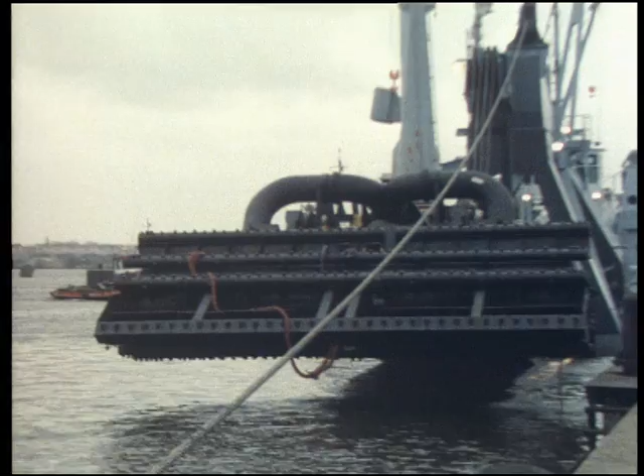The work to modify the Gotland for the Hong Kong contract was undertaken in Holland. Bilfinger and Berger installed a 10-meter wide device known as the dust pan. This is lowered to the seabed, where its powerful water jets loosen the relatively compact granular deposits. The dust pan, which exploits the deposits horizontally, is an innovative solution to the dredging problems involved, and it's the first time it has been used in a Hong Kong operation.

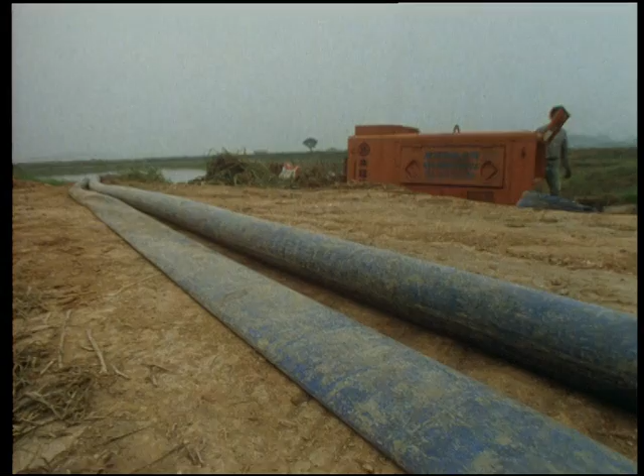Work on site in Hong Kong is also well underway. The ponds are dewatered, draining away to the north. New land will soon appear, formed as the sand, mixed with seawater in a proportion averaging 1:4, is pumped in. Just as the marine surveys have mapped out the ancient deposits which are to renew this land, so the land-based teams survey with great precision the old fish ponds, charting their depths, their retaining bunds, and their trackways.

The vast quantities of data which are gathered have to be inspected and modelled using computer algorithms to provide electronic maps and sections of the site. This MOSS modelling, as the particular computer package is known, allows the engineers to produce the required drawings very quickly, and also allows them to exercise stringent quality control over the whole operation, using online methods. The fill can thus be produced and placed exactly as required, at the optimum speed.

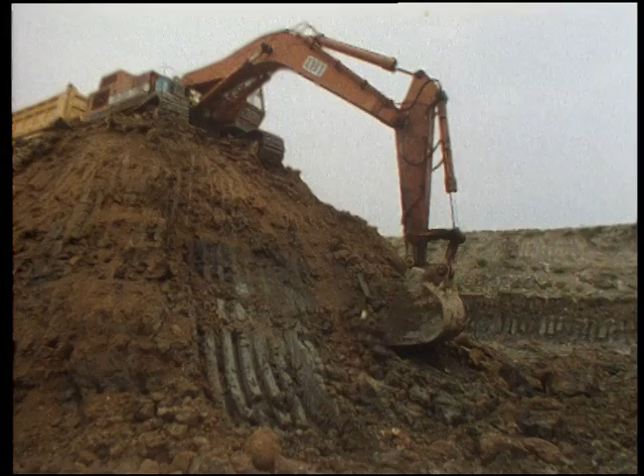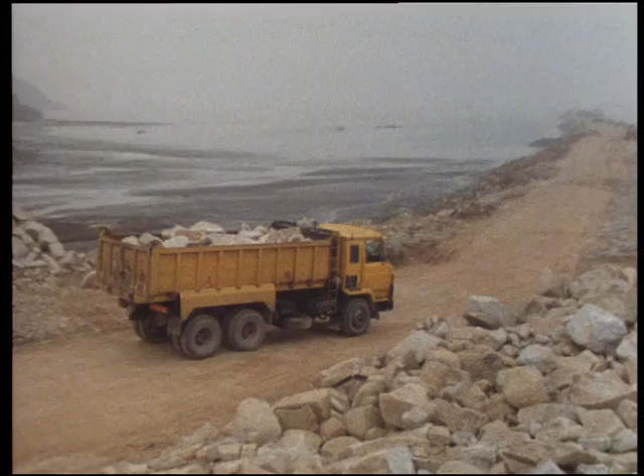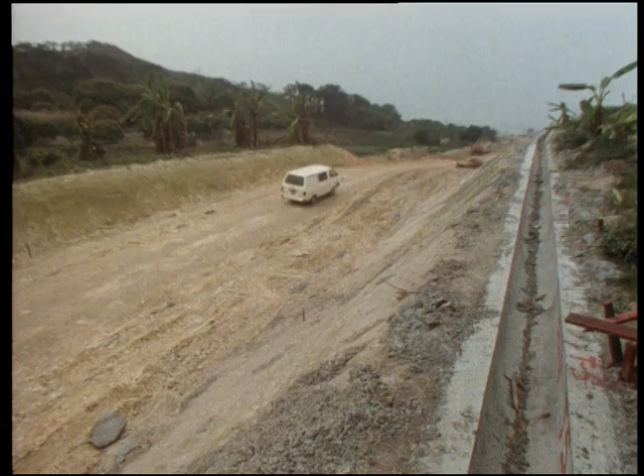Ponds may have died to their old use, but the soil from the bunds is conserved on tips that will eventually supply topsoil for the parks and public gardens of the new town. A causeway has been built as part of a land access corridor over 1,000 meters long. It is down this corridor that the pipeline delivering the fill will be laid. The land access corridor, like the entire scheme, is part of a design that seeks to disturb the surrounding environment as little as possible.

The scale of the project can be sensed from the fact that two of the ships involved in the dredging, the Gotland and the Neuland, were themselves shipped out to their workstations. The two dredgers' journey from Holland to Hong Kong lasted a month. They were transported on a dock lift vessel, which also had on board the 12 kilometers of pipe sections and the massive booster pumps, each weighing some 100 tons.

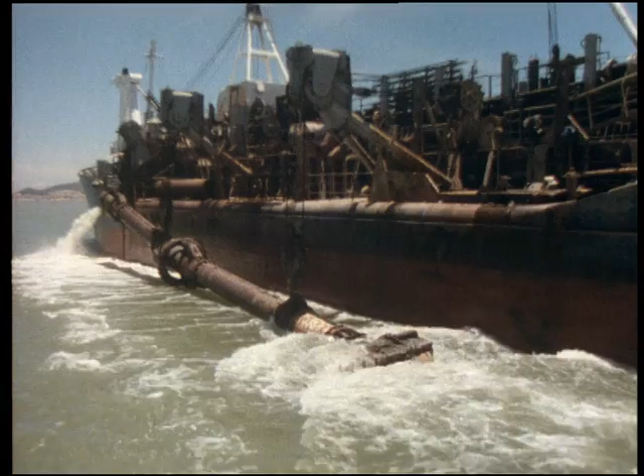The Wiesbaden has an important role to play. Some 30 million cubic meters of marine mud must be moved before the Gotland can get at the fill. The Wiesbaden systematically dredges the exact site of the spots selected by Bilfinger and Berger from the proposed borrow areas. She trails a suction head along the bottom. The mud is dredged by means of suction, and the Wiesbaden then heads for an area south of the island of Cheung Chau, some 50 kilometers away.

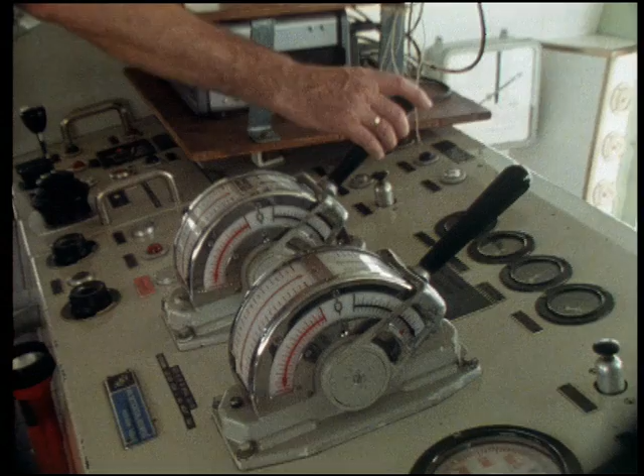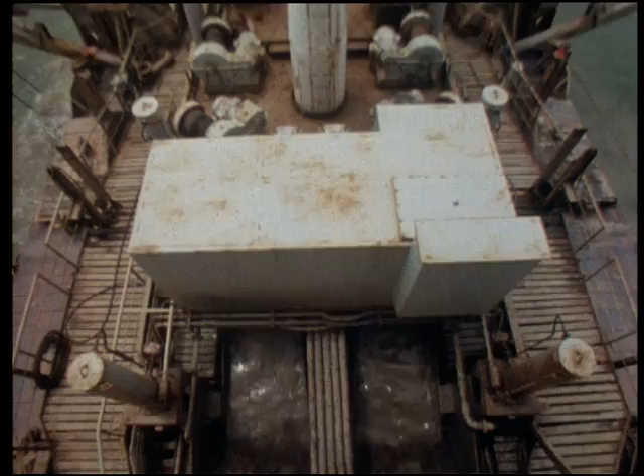Off Cheung Chau, the Wiesbaden deposits her load of mud by opening valves in her hull and starts back north for the next cycle of dredging.

Off the end of the causeway, another seabed excavation is underway. This is the formation of the rehandling basin, into which the fill will initially be placed. It is essential to have this basin if the fill so carefully won and sent up the coast by barge is to be optimally retrieved by the Bilberg 1 for pumping ashore. The barge train itself must operate within the confines of a specially dredged channel now being prepared.

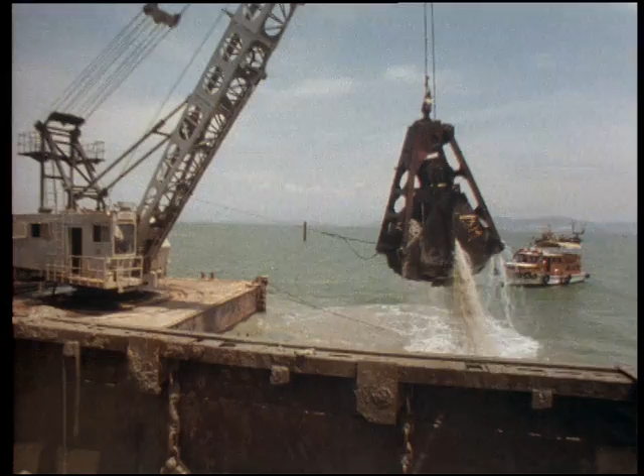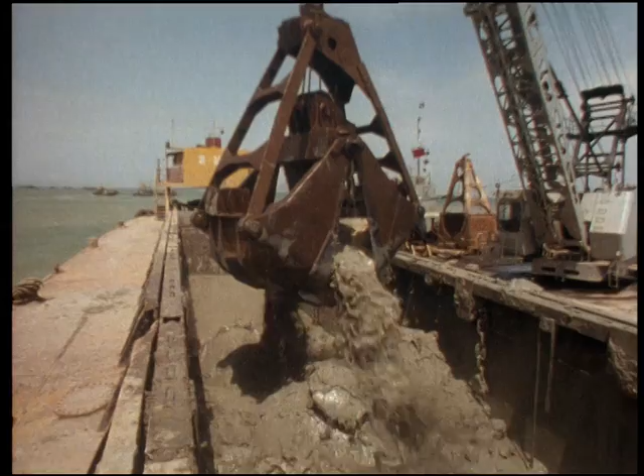Dredgers come in all shapes and sizes, and each one has its own characteristic mode of operation and special application. The type of dredger that perhaps evokes the most nostalgia in the heart of the experienced dredging man is the bucket dredger, with its simple principles and sturdy machinery.

The dredging crews on all these vessels, as indeed all the engineers from the company, can expect to work 12 hours a day, 7 days a week for 3 months at a stretch. Such is the pressure to keep the operation going at maximum efficiency.

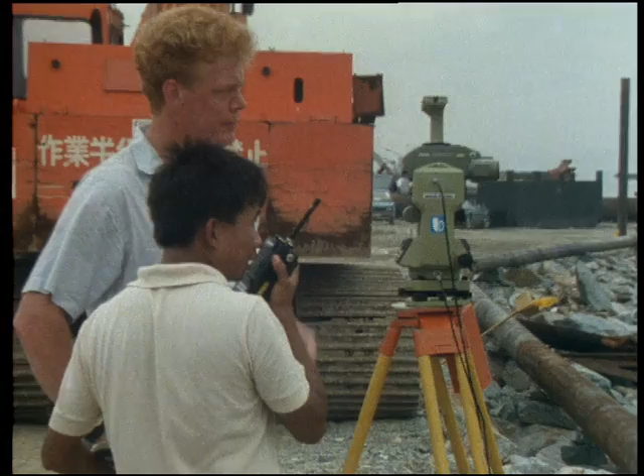The same pinpoint accuracy that maps the seabed and its reshaping operates above the surface to ensure that the engineer in charge of the dumping of fill by each barge will eventually be able to position each one exactly where the Bilberg 1 wants the fill to be. Poles with site markers on them are placed in the rehandling basin, and these are sturdy enough to moor the Bilberg 1 by means of wires. The site markers will help guide the barges into position.

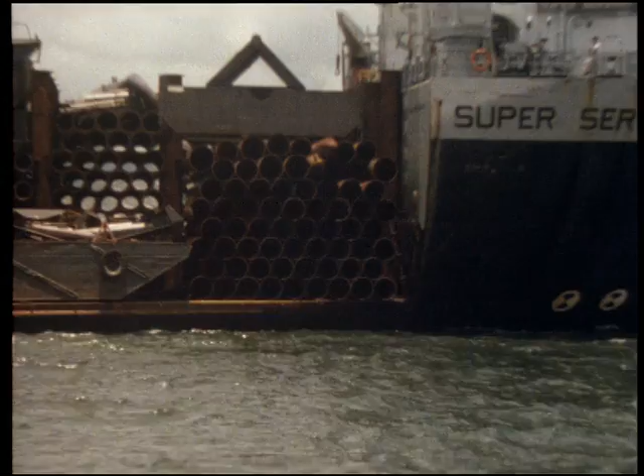By now, the dock ship vessel, with its massive cargo of machinery, pipes and 2 dredgers, is lying just to the north of Hong Kong's largest island, Lantau, not far from the site where the Wiesbaden is dredging the unwanted marine mud. It will take 3 days to unload the land-based equipment that she has brought with her from Holland, but a mere 2 hours to flood her sufficiently to allow the Gotland to float free from her deck. The whole operation marks another first for Hong Kong.

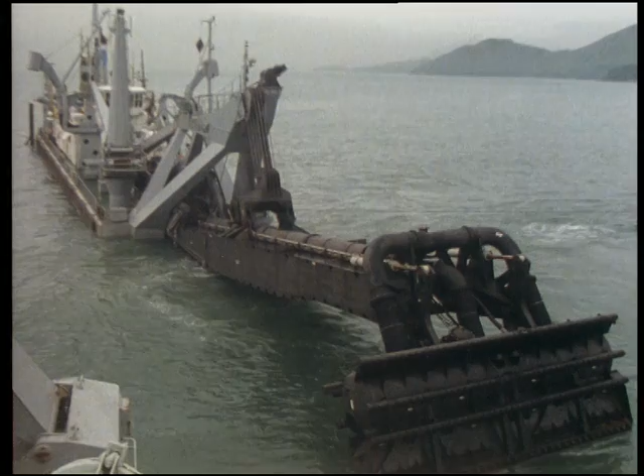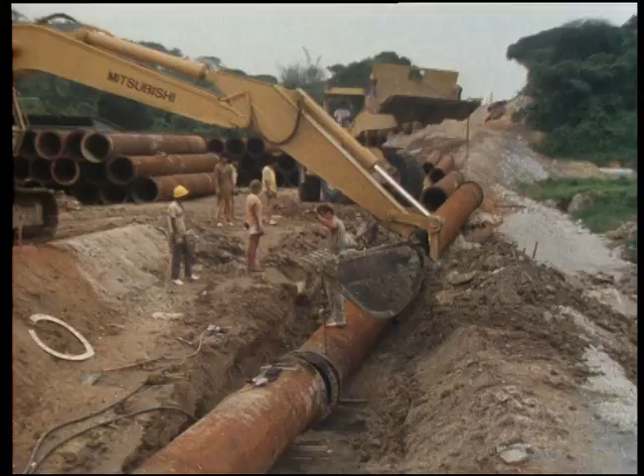Back on land, the pipeline is rapidly taking shape. Specially trained fitters and welders assemble the strung-out sections into a continuous line that will deliver an unending stream of fill for more than 2 years.

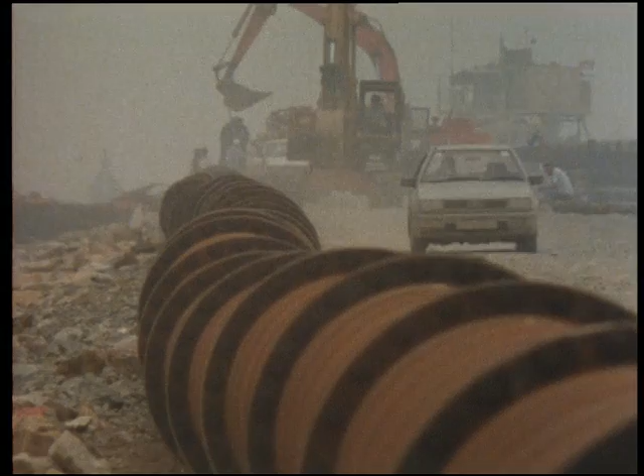Throughout its length, the pipeline will be subject to abrasion from the sandy fill, and this means that the pipe sections will gradually wear away, bottom first. The sections can be turned, each one at least twice, to even out that wear. But eventually the monitoring program will dictate that they have to be replaced, and this must be done with a minimum of interference to the filling.

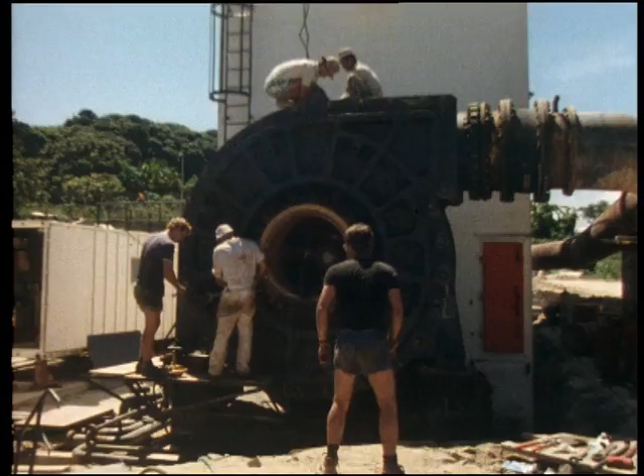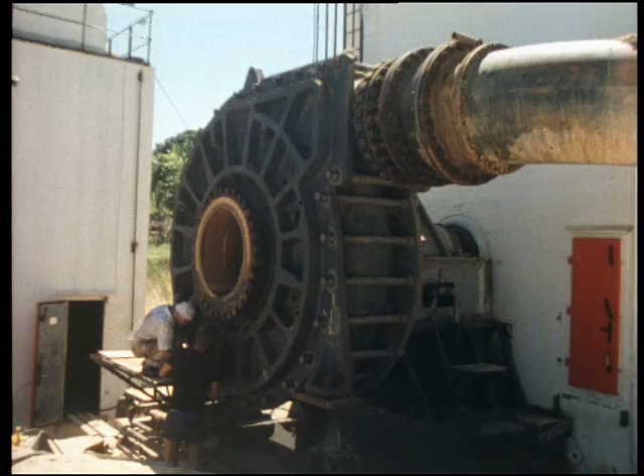The booster pumps are placed into the line in series. These pumps build up the pressure in the pipeline that is required if the fill is to be delivered to the southernmost areas of the site, a 6-kilometer journey. The pumps are surrounded by special sound-reducing housings as part of the noise control measures exercised on site. Both pumps, rated at 3,600 horsepower each, will be needed to produce the pressures required initially. But by the time the fill is travelling only to the nearer northern sector of the site, one will be sufficient.

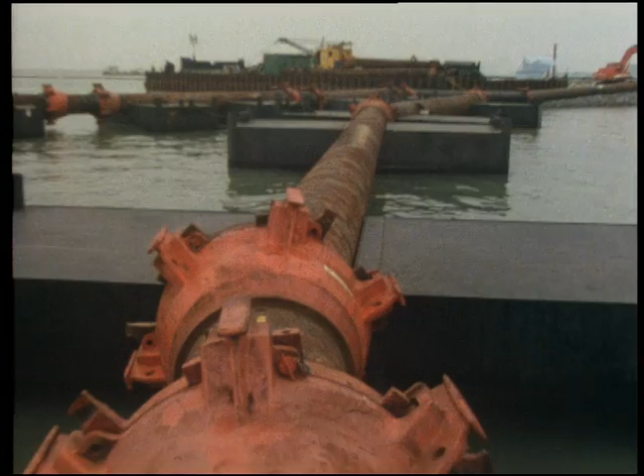In Deep Bay, the Bilberg 1 arrives under her own power. She is carefully manoeuvred into position at the rehandling basin. She will be connected directly to the marine end of the 800mm diameter pipeline. This means that some sections of the pipeline must be floated and given flexible ball joints to absorb tidal and wave movement, and to allow the Bilberg 1 to be readily repositioned.

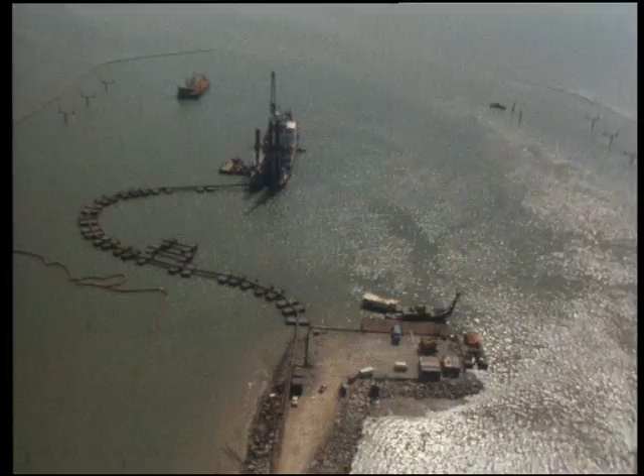The last link in the chain is now in place. The Bilberg 1 is now moored to the poles with their site markers. The whole rehandling basin is only 400 meters square, so there is no room for conventional anchors. Not only is this particular part of the site very restricted, it is also subject to further environmental controls.

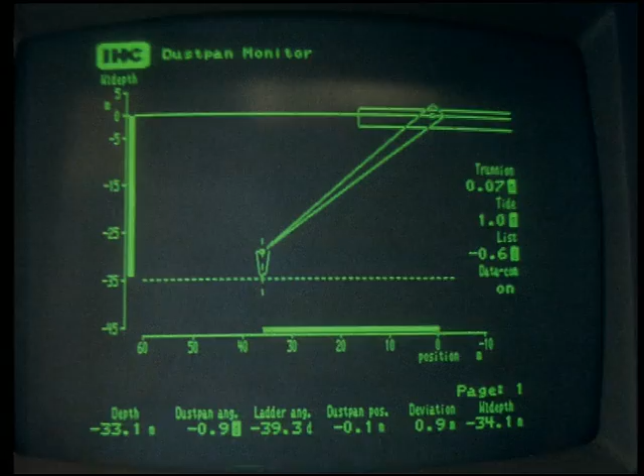To the south, the granular fill has been exposed by the Wiesbaden's dredging. It is now the task of the Gotland to win this fill from the seabed at depths of up to 44 meters. The massive dust pan acts like a precision vacuum cleaner. Its angle and depth, as well as the exact status of the whole operation, are constantly monitored and controlled by computer-assisted techniques. The Gotland is anchored by up to 6 anchors. As the dredging proceeds, she moves forwards and backwards.

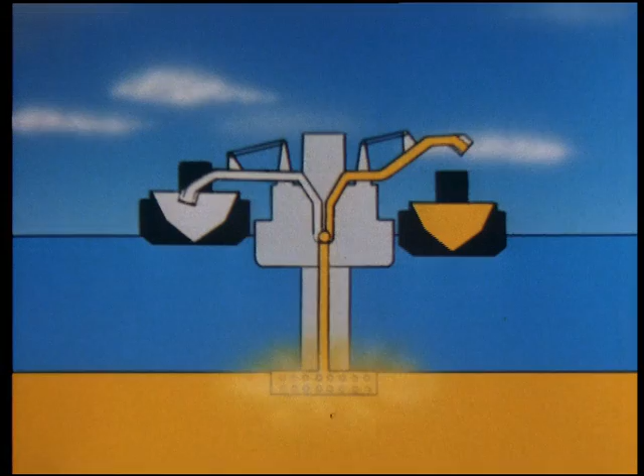The sand that she agitates with her pressure jets is sucked up and pumped into the barges alongside. Each of the barges on the project takes between 15 and 20 minutes to load, the sand sinking gradually to the bottom of the well. Each barge is loaded through a spreader pipe, which distributes the fill evenly over the length of the well. Survey work continues as the dredging proceeds. Echo-sounding transducers map the changing contours of the seabed.

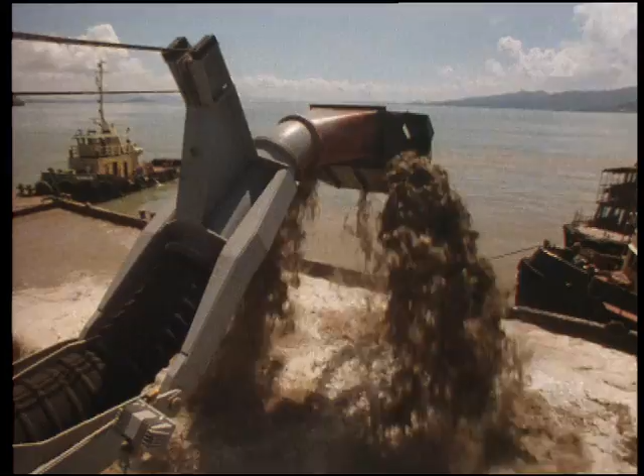The tugs take the filled barge off and into the barge train, which goes up the coast to the rehandling basin. The largest of the barges used on this contract have a capacity of 1,000 cubic meters. They are split barges and are known as push barges, for they have been specially modified for pushing by the tugs that take them off into the train, which is made up of 10 barges altogether. Each barge is carefully maneuvered to its correct dumping position in front of the Bilberg 1. Whereas the doors of the older type of barge operated by means of chains, these split barges are hydraulically operated.

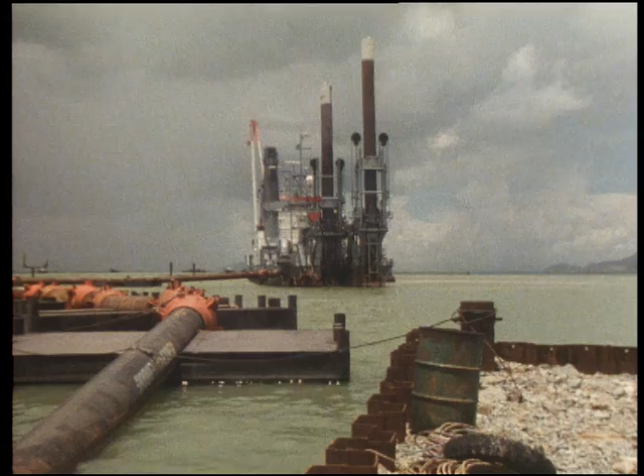The rehandling basin is divided into sections, each of which is filled in turn in readiness for the dredger to recover the fill later. The Bilberg 1's cutter suction head moves through an extensive arc to dredge the contents of the sectionalized basin. This movement, like the whole operation, is supervised from a central computer-assisted control point. Everything is controlled by the one operator, although naturally he is supported by a deck and engine room crew.

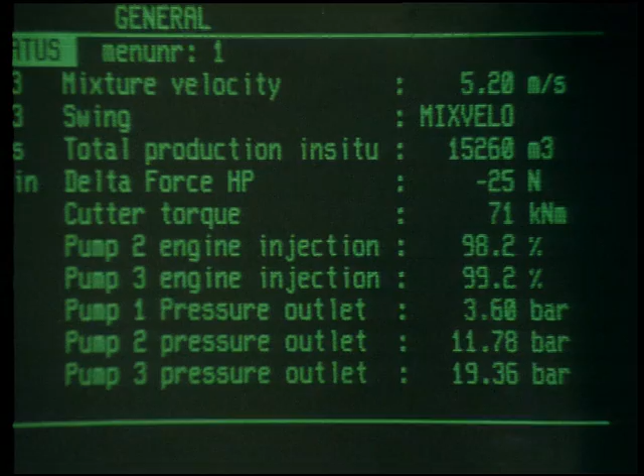The head, at the end of its long ladder, sweeps across the fill. On-board winches pull the Bilberg 1 through the arc, paying in and out the wires which moor her to the poles at the side of the basin.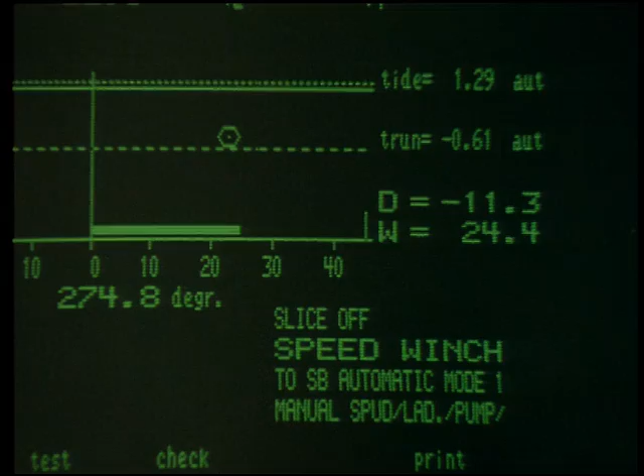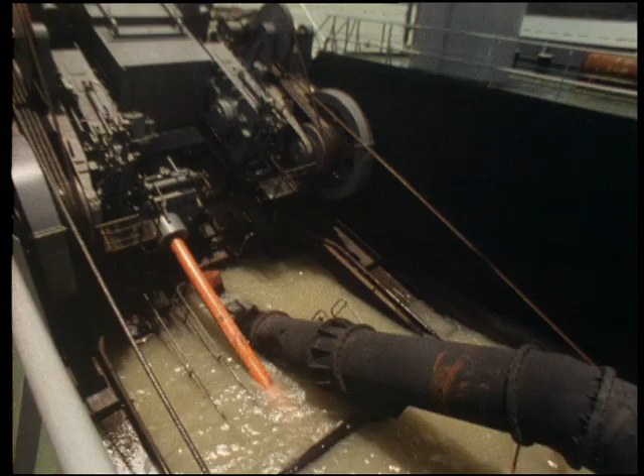The Bilberg 1 can dredge to a depth of 25 meters. The cutter and submerged pump are together rated at over 8,000 horsepower. The two delivery pumps are together rated at 10,000 horsepower. The total installed horsepower of the Bilberg 1 is 22,000.

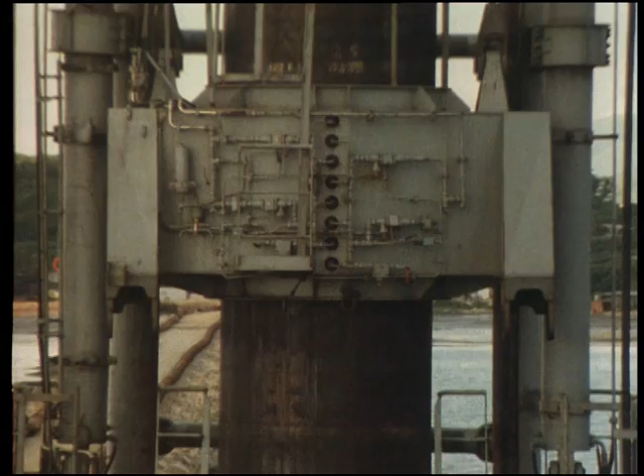The forward movement of the cutter head is achieved by advancing the vessel. The Bilberg 1 has two 120-ton spud poles, steel legs that pin the dredger to the seabed. When the vessel is dredging, the spuds can be hydraulically raised and lowered to move her forward.

The working spud on the center line at the stern is lifted, and the helping spud on the starboard side is lowered. The working spud then moves to its new position, fully retracting the hydraulic ram along the center line. The working spud is then lowered, and the helping spud is raised. Each such step enables the Bilberg 1 to advance a further 6 meters.

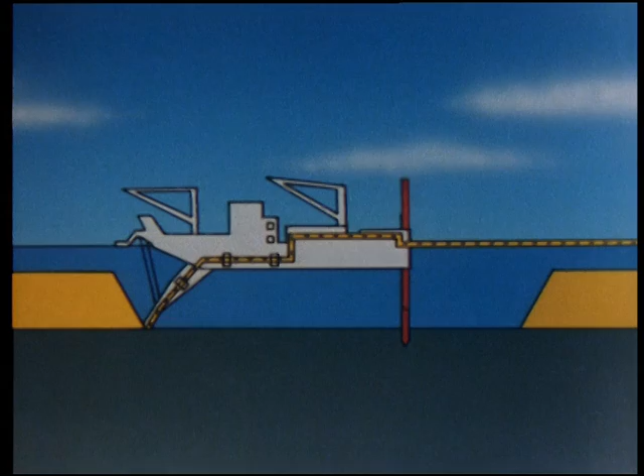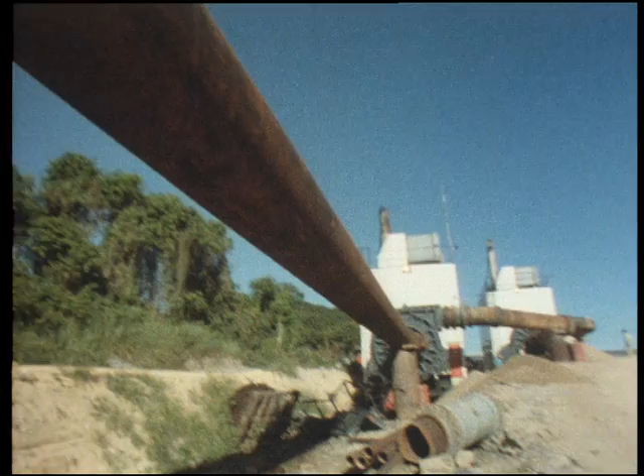June the 1st, 1988. The mobilization and installation is complete. The months and years of meticulous planning are crowned with success as the first fill begins its 6-kilometer journey to the site. But the transformation of Tin Shui Wai's fish ponds into solidly compacted and well-drained building land will take more than 2 years to accomplish.

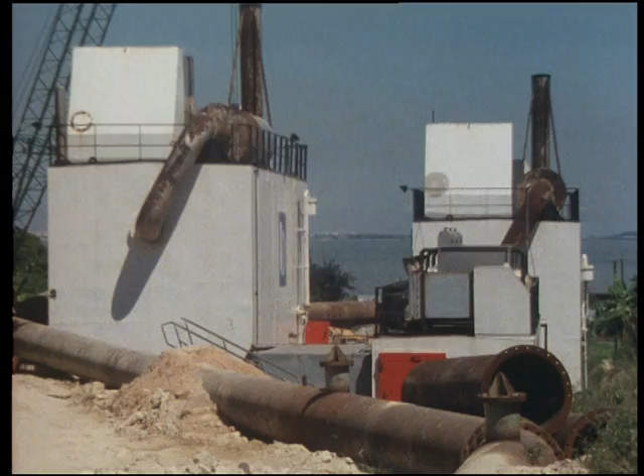Placing 20 million cubic meters of sand at a rate of 12 hectares a month will demand the deployment of Bilfinger and Berger's full armory of dredging expertise. The Bilberg 1, Wiesbaden and Gotland will be joined by other equipment using different techniques for winning the sand.

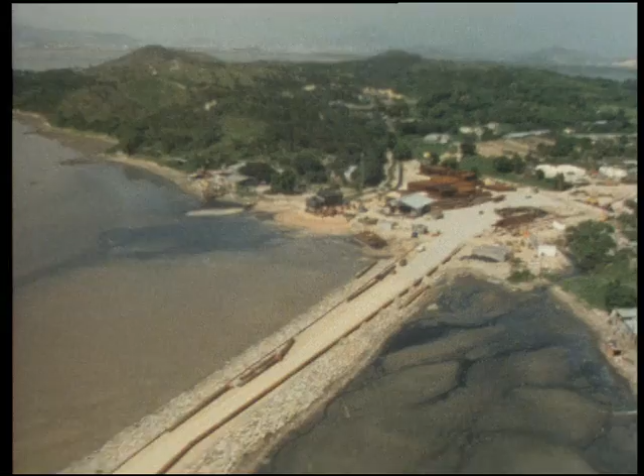The borrow areas of Urmston Road and Deep Bay are difficult and restricted. Dredging conditions vary widely in a small area. Constraints are imposed by the requirements of shipping in the vicinity. The pumping of the fill presents problems no less than its winning.

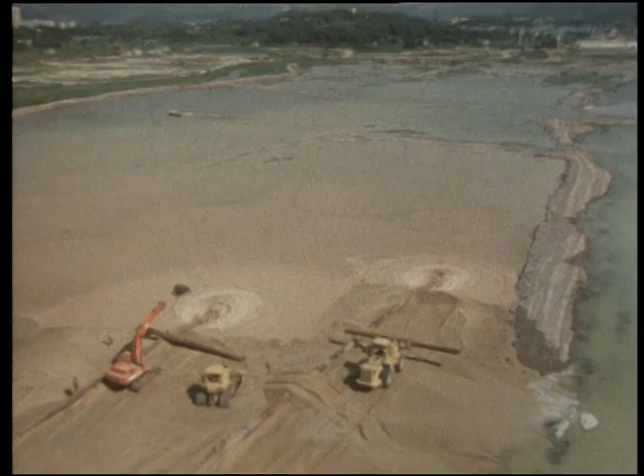From the delivery pumps on Bilberg 1, through the floating pipeline and the boosters, along the 800mm land lines to the 600mm outfalls at the site, pipes and equipment will be tested unceasingly to their limits. As the months pass, this wear and tear will become significantly greater than had been imagined.

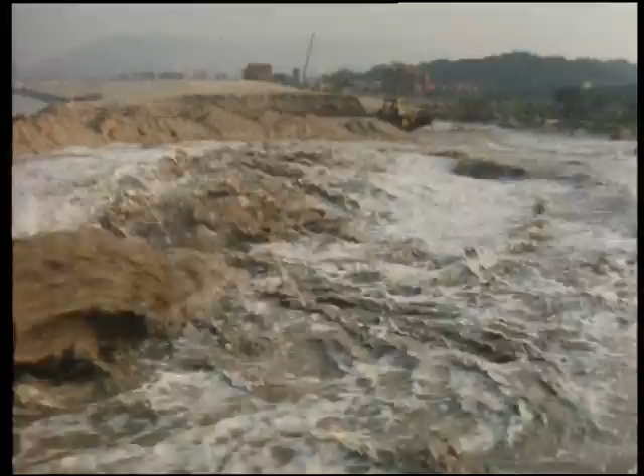Sand is the enemy of machinery. Traveling through pumps and pipelines at an average speed of 7.5 meters per second, the sand and seawater mixture has a destructive capacity which is impressive. The property of the sand, which is absolutely crucial, both to its value as fill material and as an indicator of probable wear and tear, is grain size.

Every day, core samples are taken on site. By a series of sieves, the constituent grains are batched into different sizes, their weights and dimensions being recorded on a log sheet. These results, when collated and put into the computer, provide guidance in repair scheduling and production.

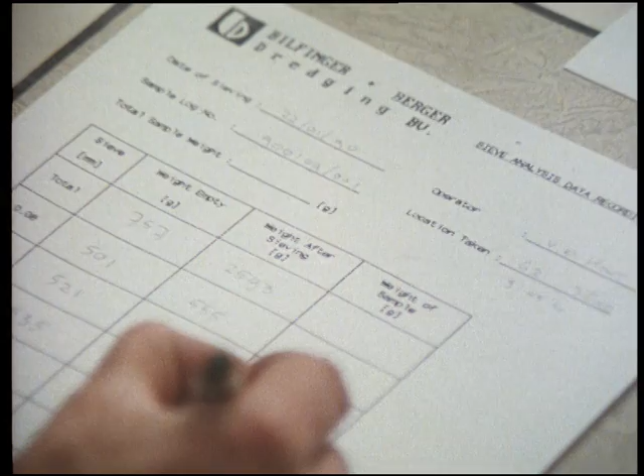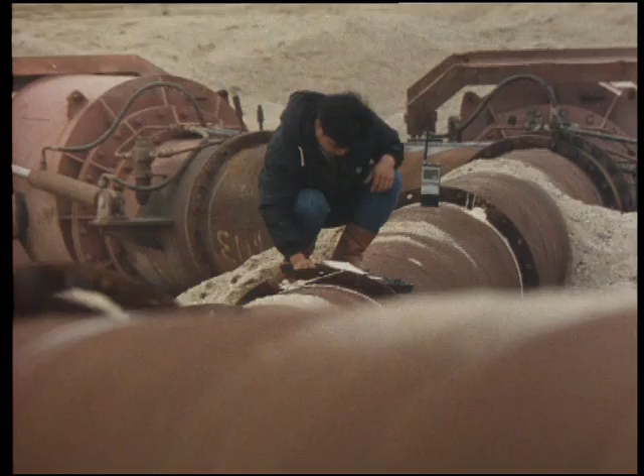The pipes delivering the fill are also monitored regularly. Wear in the pipes usually starts bottom first, due to the effect of gravity. So the maximum life of the pipe section is obtained by rotating it 3 times through 90 degrees after the initial wear has taken place. Ultrasonic testing shows the pipe's thickness. This vigilance is essential to detect flaws before they become critical.

Hallo Bilberg 1, hallo Bilberg 1, hallo Bilberg 1.

A defect is discovered in a pipe section. The foreman on site alerts the dredge master on Bilberg 1 so that the throughput can be shut down while the pipe is changed.

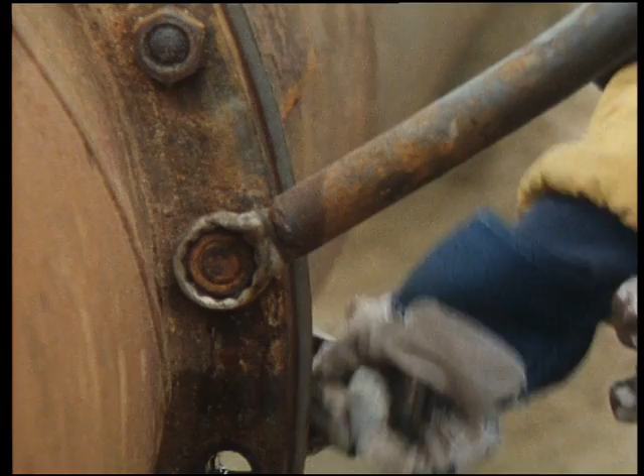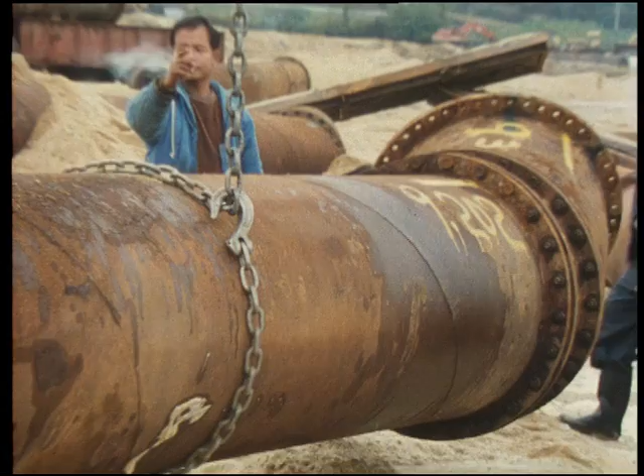Wear in the pipe is not just a matter of gravity. Extra wear can be caused by larger grain size or by increased mixture velocity or density. Then there is turbulence. In a spiral welded pipe, the weld seam can create a vortex effect. Indeed, any protrusion inside the pipe can cause wear resulting from asymmetrical flow patterns. Angled sections are particularly vulnerable, and they cannot be turned.

Pipe wear is more severe in those sections immediately downstream of the delivery and booster pumps. Frequent pipe rotation and replacement are therefore required in the floating sections next to the Bilberg 1.

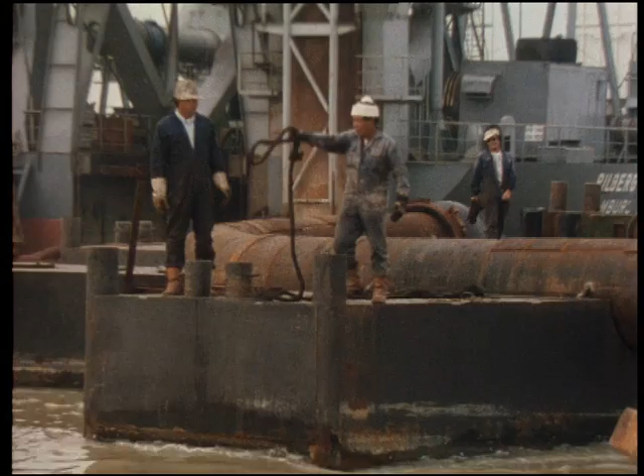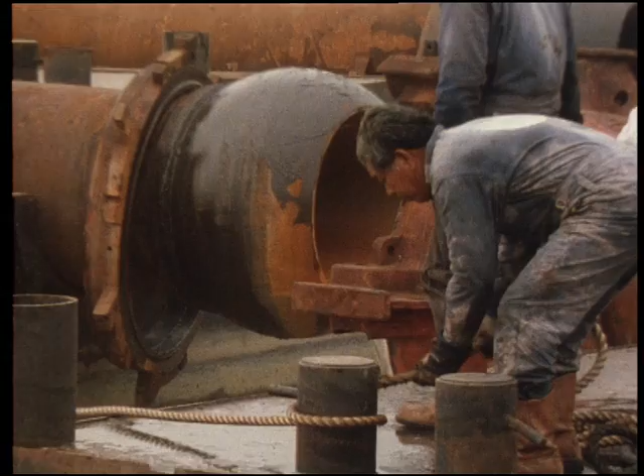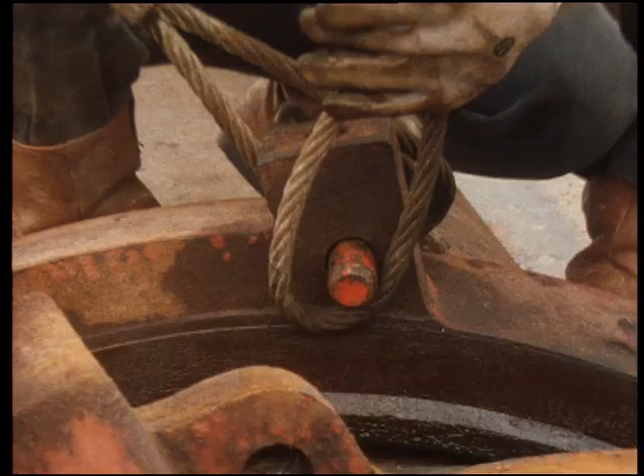Where possible, maintenance work on the pipes is timed to coincide with repairs to the Bilberg 1's delivery systems, so that production downtime is kept to a minimum. The pipe sections removed are not junked. It may be possible by welding or by the addition of an outer sleeve to a worn pipe to prolong its use. 25mm gauge hardened steel pipe shipped from Europe is not an expendable commodity.

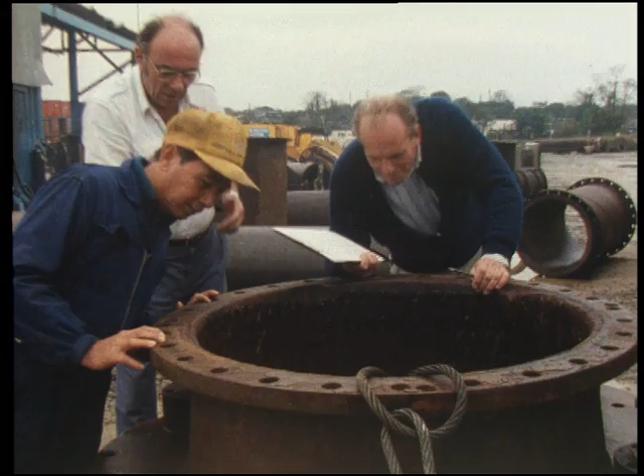At Bilfinger and Berger's workshop on the Tin Shui Wai site, pipe sections, flanges and joints taken out of service are examined to find out whether they can be repaired. Here can be seen in full measure the destructive effects of sand and seawater.

Yeah, see you. Yeah, you can nothing do about this, I think. It's completely worn here. Yeah. Over there also. Yeah. You see? Terrible.

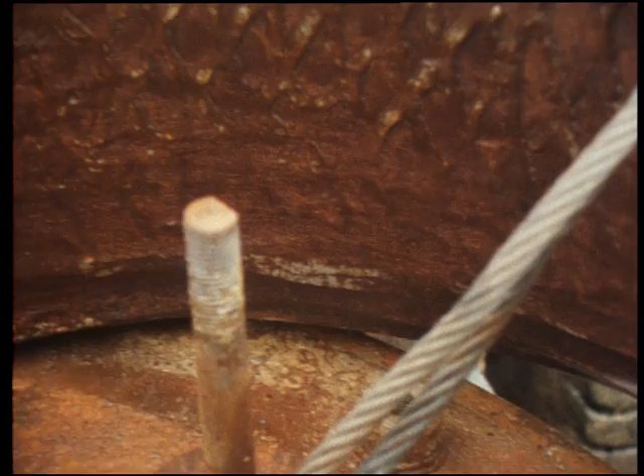In Urmston Road, sand recovery is boosted by a suction pump unit. This unit, called Amix, is a local A-frame barge with a 750 horsepower underwater suction pump suspended from its derrick. The sand and water mixture is delivered from the seabed by a flexible hose to the loading system. This economical addition to the dredging fleet was very quickly put into operation and saved the expense of bringing in new equipment from Europe.

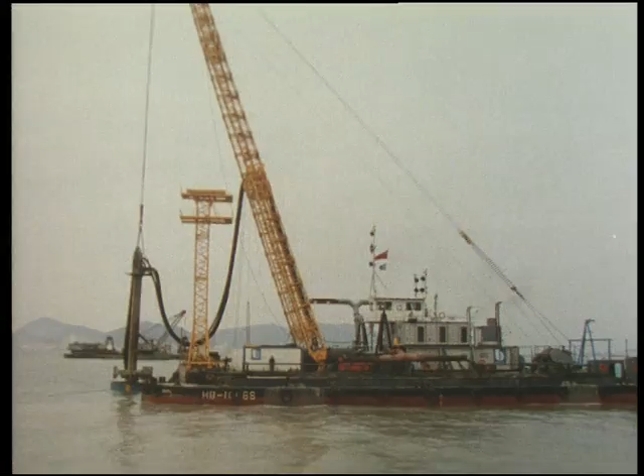In Deep Bay, dredgers Badu 1 and 2 win the sand by penetrating a thick overburden of marine and alluvial clay. The Badu system drill bit, when submerged, employs flushing jets to clear the borehole of mud and debris. When sand is encountered, it is agitated by jetting water and airlifted in suspension up the drill pipe. The drill's descent through the clay layers is governed by a rocker device. The rate of penetration of this equipment and the pressure on the bit is monitored and adjusted in the control room.

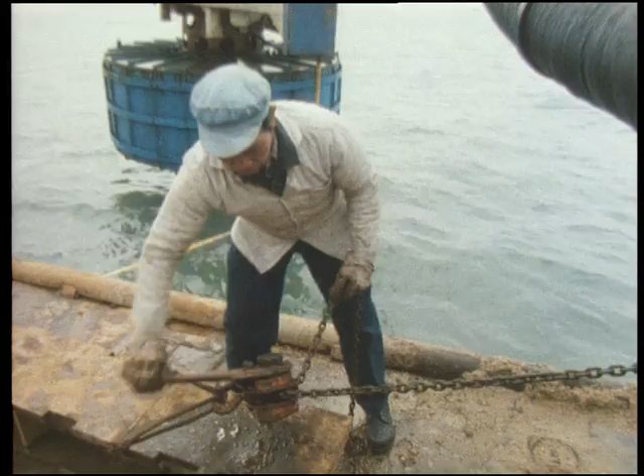The airlift system works by differential pressure between the aerated water inside the drill pipe, which carries up the sand, and the surrounding seawater. Its efficiency is the same at all dredging depths. Clay layers too tough to be removed by trailer hopper dredgers can be penetrated with comparative ease, and the minimal number of moving parts in the sand airlifting system means far fewer problems of wear and tear. When the sand layer is reached, the loading pipe is connected and loading proceeds through the spreader pipe to the barges.

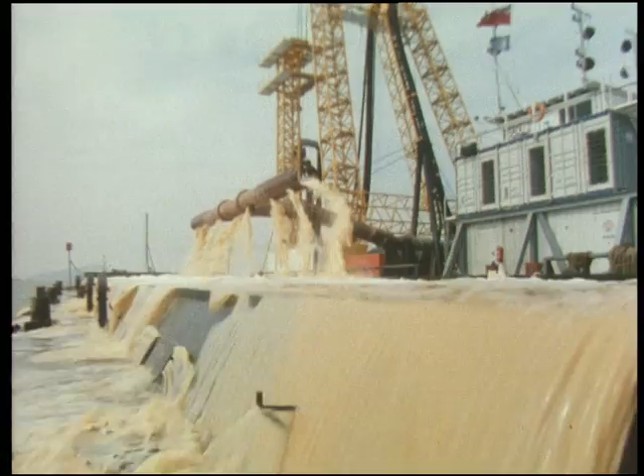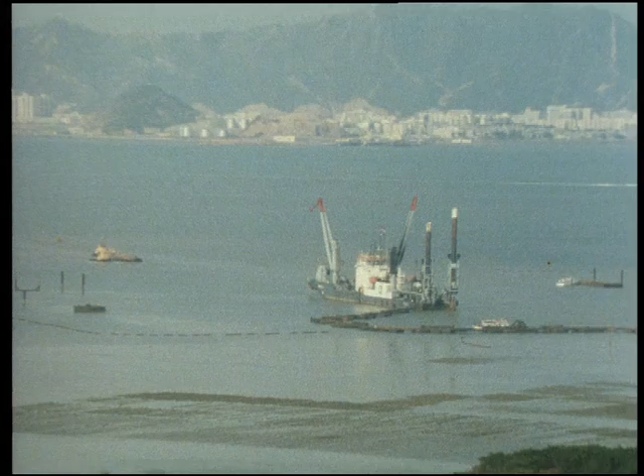The procession of barges to and from the rehandling basin is never ending. On the Bilberg 1, the lights go on. For Hong Kong at large, it's dinner time, cinema time, late shopping time, going out for a drink time. Here, it's pump overhaul time.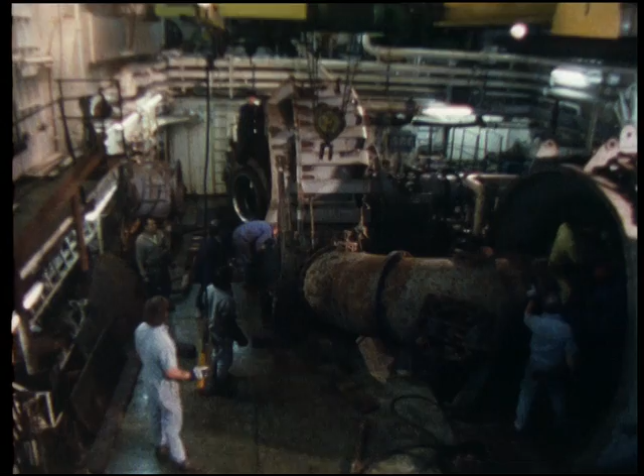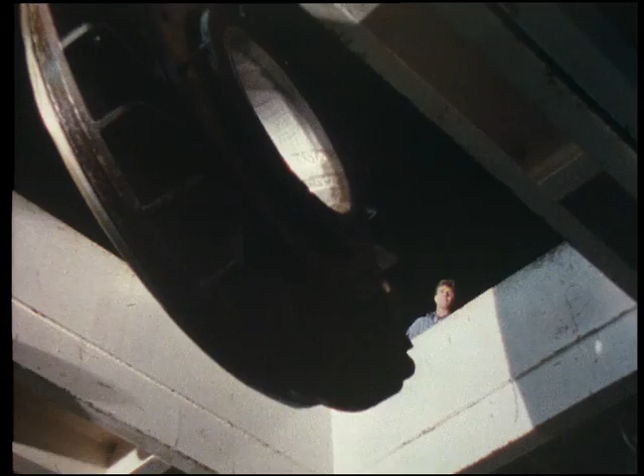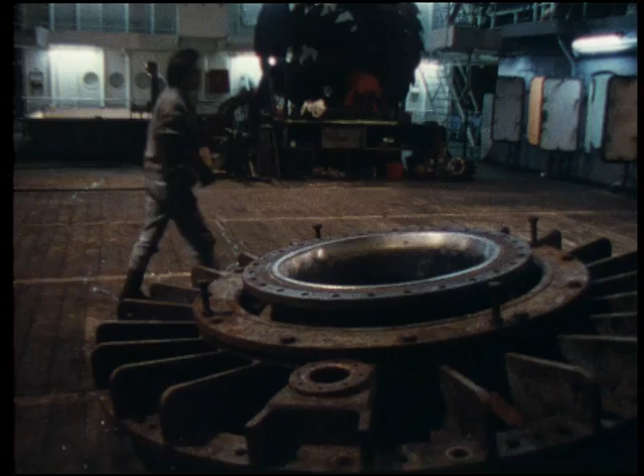Every 6 days, the Bilberg's inboard dredge pumps must be shut down for maintenance, and smaller components such as wear rings and liners replaced. The larger wear parts, such as pump housings, have to be changed every 3 months. The inner shells of these double-wall pumps suffer considerable high-pressure damage, and Bilfinger and Berger have developed their own welding techniques to cope with this. The impellers are replaced at 10-week intervals.

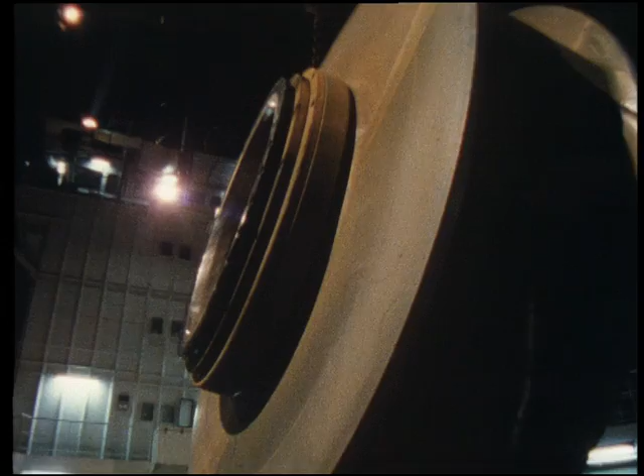When pumping, the impeller edge is cutting through a sand, gravel and seawater mixture at 90 kilometers an hour. This velocity and the grain size are the factors mainly affecting wear and tear in the other pump components. The rate of wear can be almost incredible. At points of high stress, hardened steel can be eroded by 40 millimeters in 6 days.

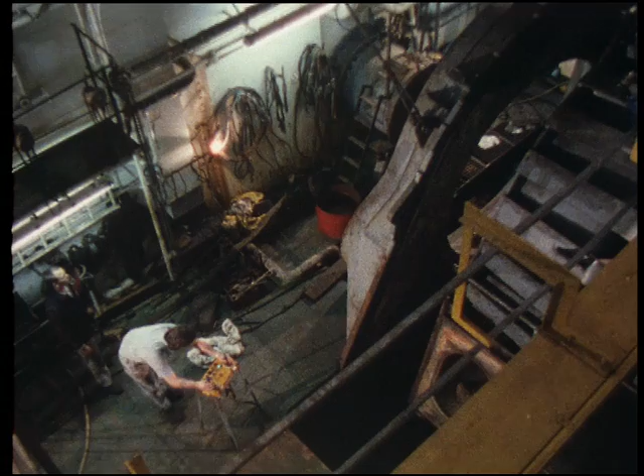The Tin Shui Wai contract has presented Bilfinger and Berger with every conceivable dredging problem. A site with an underlying weakness, borrow areas of widely differing conditions and dispersed locations, and wear and tear on equipment which reached undreamed of levels. But these extreme difficulties were met and overcome, and this experience of research and development running in parallel with the job itself has turned out to be of inestimable value to Bilfinger and Berger.

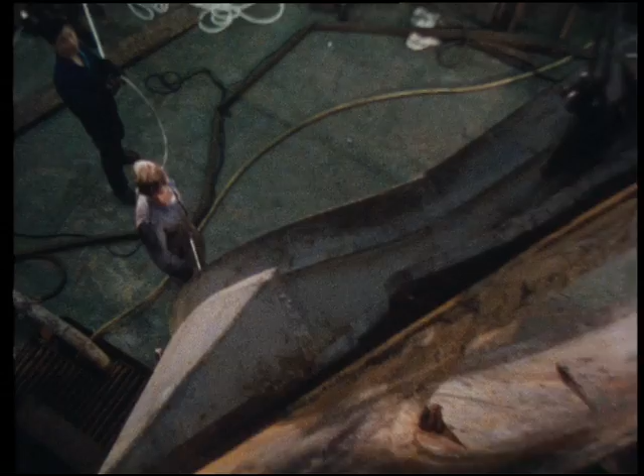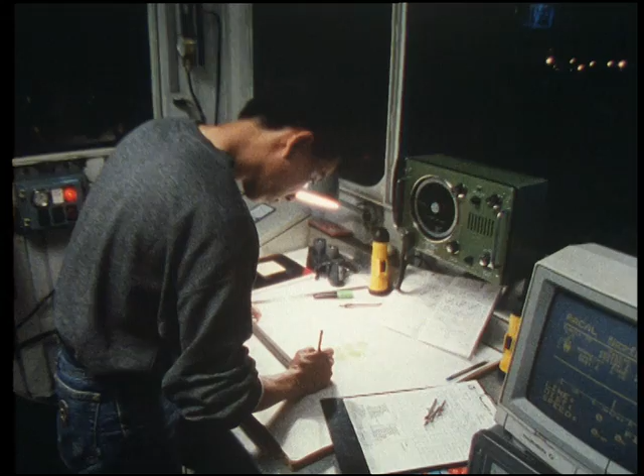So week after week and month after month, the cycle of repair and renewal continues. On the Gotland and the Neuland, the Badu 1 and 2, on the Amix and the Bilberg 1, the shifts change over, 12 hours on, 12 hours off, 7 days a week, 52 weeks a year. And the river of sand keeps coming, dredged up by dustpan and suction pump and airlift. The borrow areas are combed and quartered to yield up the landfill material that will in due time support a city.

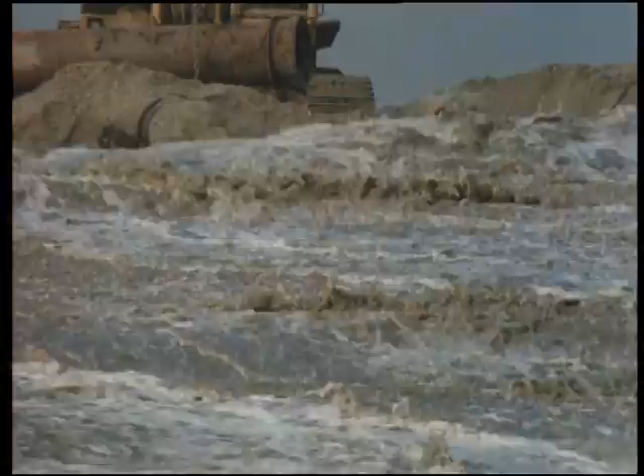On site, the fish ponds have nearly vanished under the advancing tide of sand fill. Now the surveyors take their measurements to determine when the sand level will attain its required height of about 5.5 meters above principal datum. For when the site reaches that level and has stabilized, the job will be over. 480 hectares of prime building land, reclaimed in little more than 2 years. Reclaimed at a speed unattainable with more conventional landfill methods, and with minimal environmental disturbance.

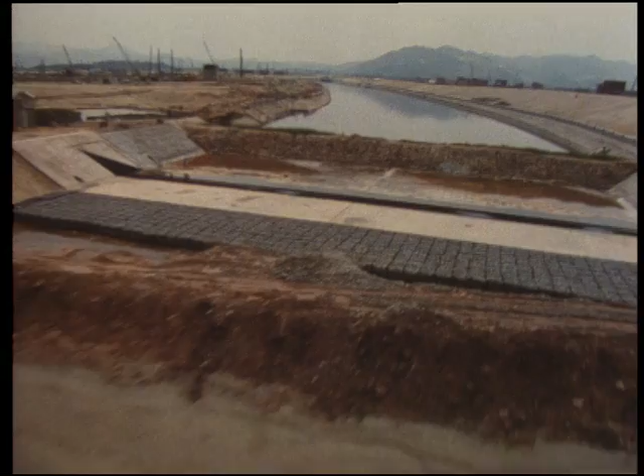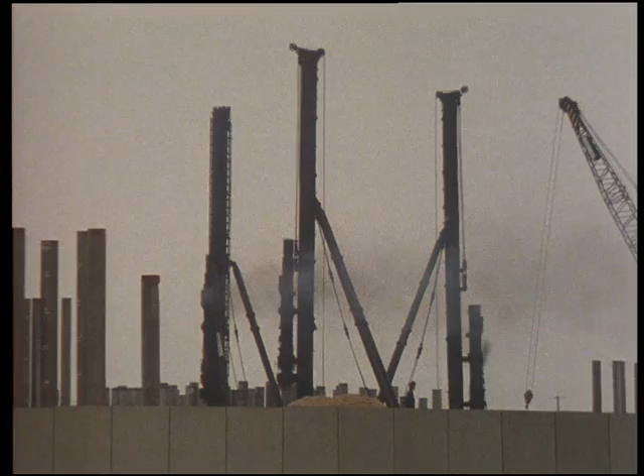Already the piles are being driven for the first of the Tin Shui Wai estates, and among the coppices of steel can be seen the emerging foundations of the tower blocks. In 1992, Phase 1 will come on stream to become home to Tin Shui Wai's first 30,000 new inhabitants. As they collect their keys and move in their belongings, they will have good cause to thank the resourcefulness and engineering skills of Bilfinger and Berger, the active support of government, and the loyal service of workers at all levels that have contributed to the success of one of Hong Kong's most imaginative civil engineering projects.